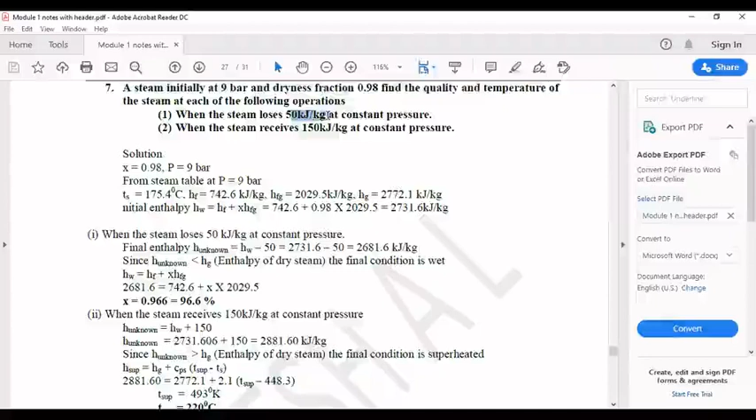Find the quality and temperature of the steam at each of the following operations. In the first question, when the steam loses 50 kJ per kg, what will happen to the condition of steam? What is the quality? Quality is nothing but dryness fraction. When the steam is initially at this condition, it is having some heat content, that is enthalpy. At this enthalpy, it is a wet steam because dryness fraction is 0.98. If it loses this 50 kJ per kg, then what will happen to the condition?

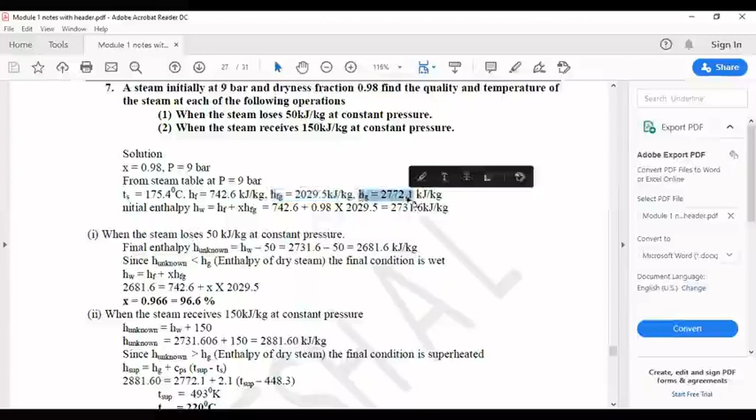So what you need to do? Look at this. X they have given 0.98. Pressure 9 bar, so I refer to the pressure based steam table. In that I have got Ts, hf, hfg, hg, every value. All these values are available in the steam table, and I just copied them here. Now, what is the initial enthalpy? That is the initial condition. According to this, it is a wet steam, so I use the formula for wet steam: hf plus x into hfg.

Why I use this is because it is having a dryness fraction 0.98, that means it is a wet steam. So I use the formula of enthalpy in the column of wet steam, that is hw equals hf plus x into hfg. hf I know, x is the dryness fraction, even that they have given, and hfg I have got from the steam table. All the values I substituted and I got this answer. So this is the initial enthalpy.

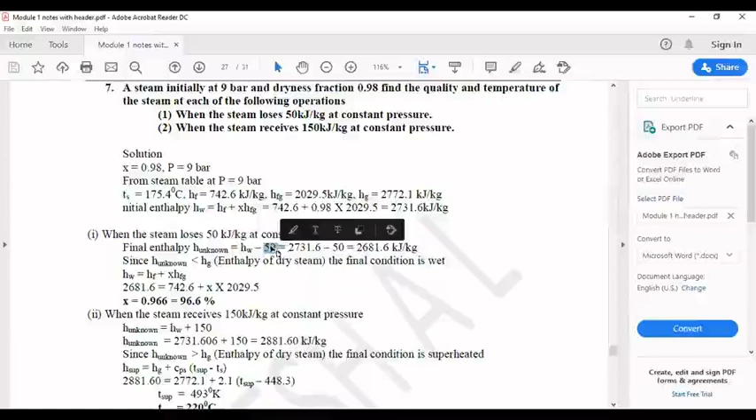From this enthalpy I subtract 50 kJ, because the steam is losing 50 kJ per kg. What will happen to the condition of steam? I don't know, because if it is a wet steam I'll write hw, if dry steam hg, if superheated steam h superheated. So since I don't know the condition, I simply wrote h unknown. Obviously, if wet steam loses 50 kJ it stays wet, but still I wrote h unknown equals hw minus 50 kJ, and I got this as an answer.

Now I should get to know the condition of steam. So I'll compare this final value, after subtracting 50 kJ, with the hg value, because hg refers to dry steam. If this is more than hg, then it is a superheated steam. But if the unknown value is less than hg, then it is a wet steam. This value is 2681 and hg is 2772. So obviously this value is less than hg, so I got to know that this is a wet steam.

So H unknown is less than Hg, so it is a wet steam. Final condition wet. So I'll mention this as HW. Again, for HW, what is the formula? HF plus X into HFG. HW you already got, that is a final value. I'll substitute here because what they asked for is to find the quality. You got to know it is a wet steam. It is just a condition.

What is quality? Quality is nothing but, if it is a wet steam, you have to find out the X value. So in this formula, HW is equal to HF plus X HFG. This value I know. HF and HFG I got from the steam table. Only X is unknown. If you find out X, that is the quality. So it is not only to find out the condition of steam. Of course, by just comparing this value with this, I got to know it is a wet steam. But that is not the final answer. They asked for quality. So if it is a wet steam, what is the X value? If it is a superheated steam, what is the temperature of superheated? That is the quality.

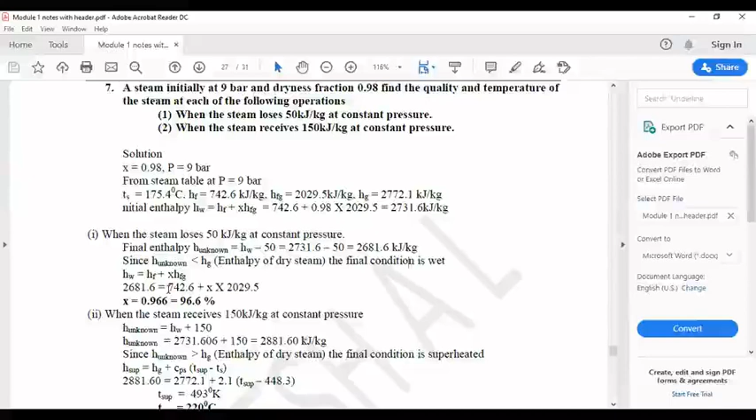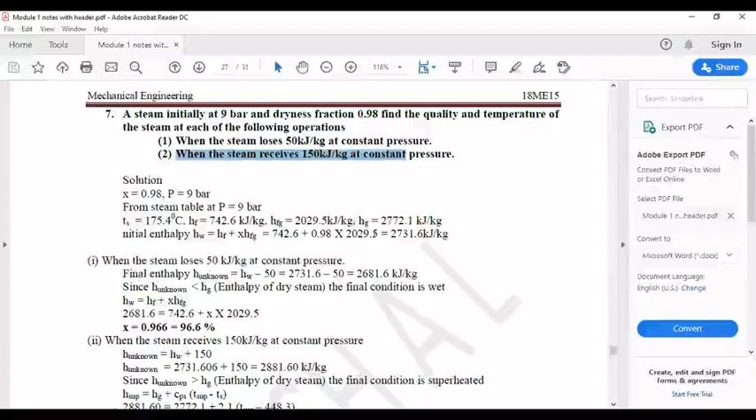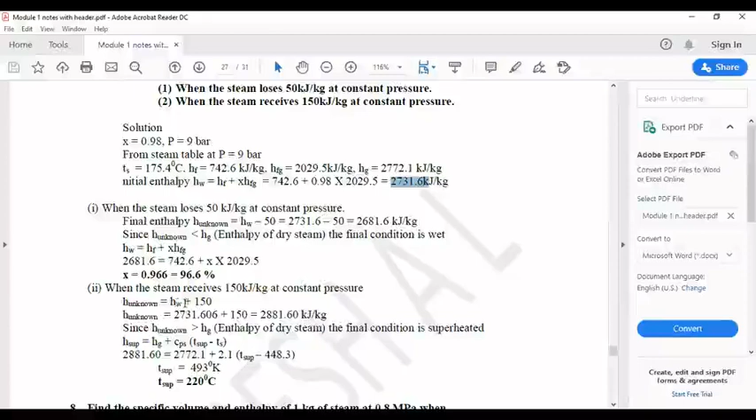Then in the second question, when the steam receives 150 kilojoule per kg, what must I do? This is the initial value, 2731.6. If it receives 150, that means to this initial value I should add 150. So HW plus 150, I have added, because it is receiving. It has to be added. After adding 150, I have got 2881.60. So this is the final enthalpy after adding 150 kilojoules.

Whenever you add or subtract the enthalpy values, you must check with respect to Hg. Now, 2881 is more than this Hg value. Hg value here is 2772.1. Here you have got the value as 2881. I referred to it as H unknown because I don't know what the condition is. If it is wet steam, you write W. If it is dry steam, you write G. If it is superheated steam, you should write SUP.

But after adding 150 kilojoule, I don't know what the condition is. I'll just check now. I got 2881. When I compared this with the Hg value, I got to know this is more. So this is a superheated enthalpy. So in place of unknown, you must write superheated. This H unknown value is more than Hg, so it is superheated. I have mentioned it as H superheated. You got to know it is a superheated steam. That is the condition you identified.

But what they asked for is quality. Quality is nothing but, if it is a wet steam, you have to find out X. If it is a superheated steam, you have to find out the temperature of the superheated steam. So in this case, you identified that it is a superheated steam. That is the condition. Now you should find out the quality. Quality is nothing but temperature.

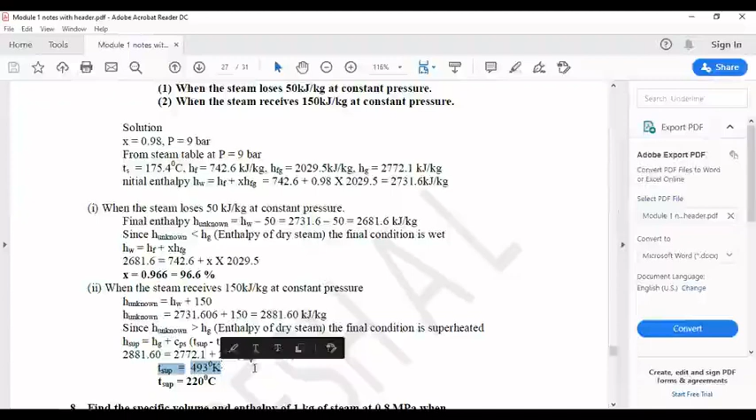So H superheated, this is a formula you already used, but you already know the H superheated value. By adding 150, you got this value. Directly substitute that value here. Then in this, you don't know the temperature of superheated steam. So you find out the temperature of superheated steam. You will get it in Kelvin; convert that into Celsius. That is the final answer.

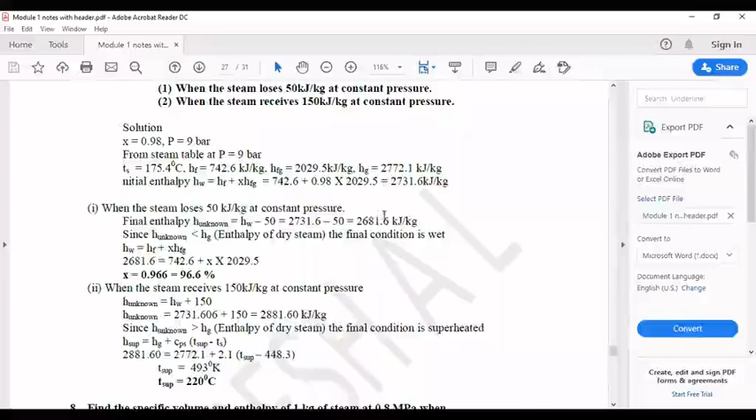So moving on to the next problem. In this, they ask you to find the specific volume and enthalpy of 1 kg. Mass they have given 1 kg at 0.8 megapascal. That is the pressure. But in the steam table, we have the pressure in terms of bar.

In the first question, the dryness fraction is 0.9. It means that in the first question, it is a wet steam. In the second question, the steam is superheated. So by this, I got to know it is a superheated steam. It is increased up to 300 degrees Celsius. The specific heat of superheated steam they have given as 2.25 kilojoule per kg Kelvin. Remember, it is the specific heat of superheated steam, that is CPS. If they give the specific heat of water, that is CPW.

Okay, moving on to this. Now they have given 0.8 megapascal as the pressure. So at pressure 0.8 megapascal, but in the steam table it is mentioned in bar. So you should convert this megapascal into bar. Simply I followed some steps. If you don't know how to convert this, I just explained here.

0.8, I kept it as it is, into mega is nothing but 10 power 6 pascal, is equal to 0.8 into 10 power 6. I converted it like this: 10 power 1 into 10 power 5. This 10 power 5 is bar. Right, 1 bar is equal to 10 power 5 pascal. So 10 power 5 pascal I mentioned as bar.